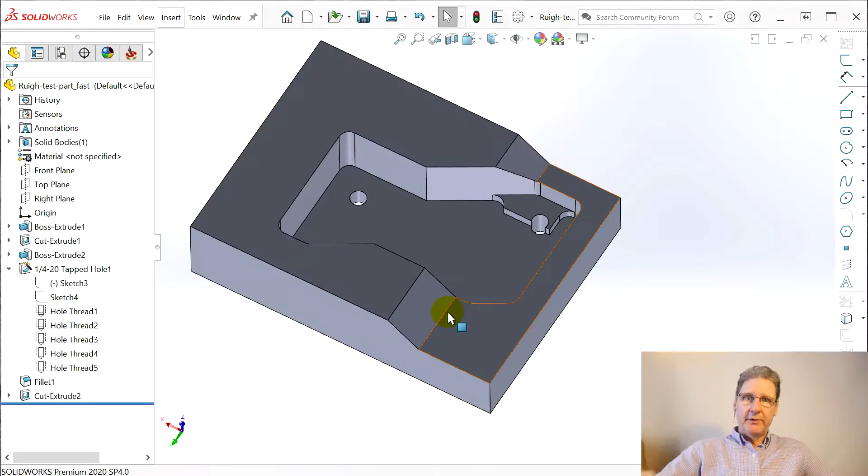So here's the SolidCAM tab, new part, milling part. And I'm learning.

Make this short so maybe that tree doesn't keep pushing over. Internal, we want it internal. Nice short name. We want to do a coordinate system now. I want it in a vise, like this. So select a face, pick an origin, flip it around, Z. That's the way it sits in my machine.

Accept all this, even though it causes problems later and there's no way to fix it that I found. Give it top setup. Say OK.

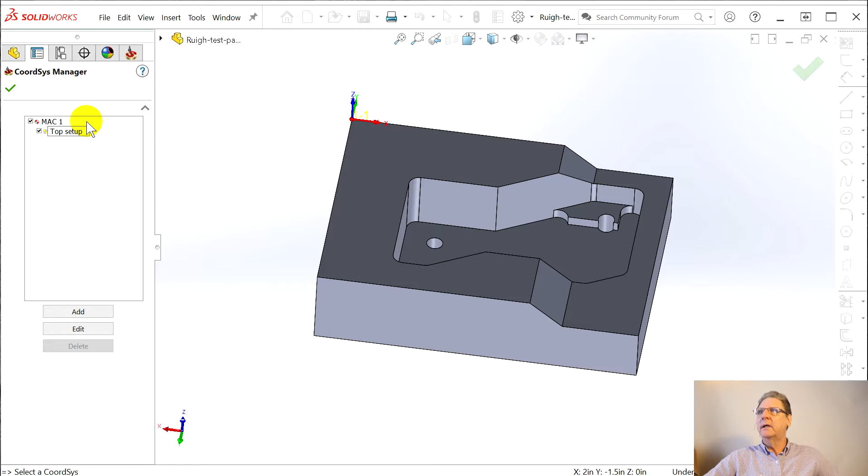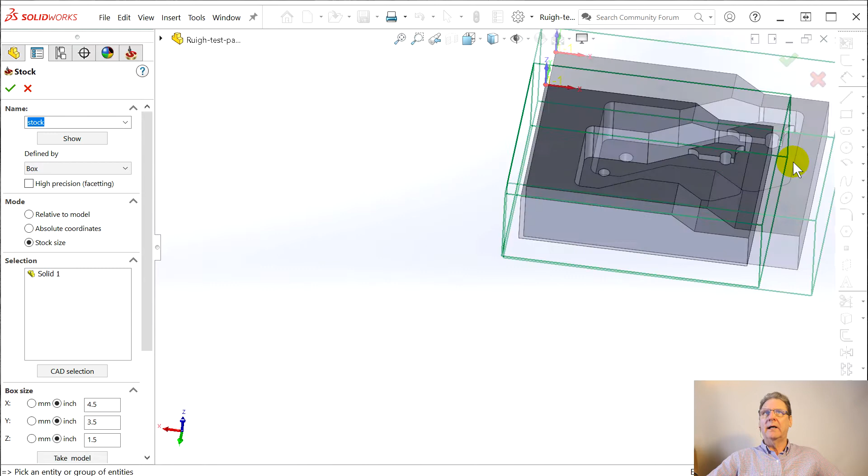Stock. I want to do it by stock size, the only rational way to do it. 4.5, 3.5 - you can't even do this in CAMWorks. 1.5, I happen to know. Oh gosh, see I'm rushing. I got to get what my mentor used to call a professional's tempo, because rushing isn't going to get it done. 0.4. So that's where we want the stock.

Then add box to model. We're going to need that to change the origin because we got to move part 0 here. It's clumsy. All this front end stuff is clumsy, but not the end of the world.

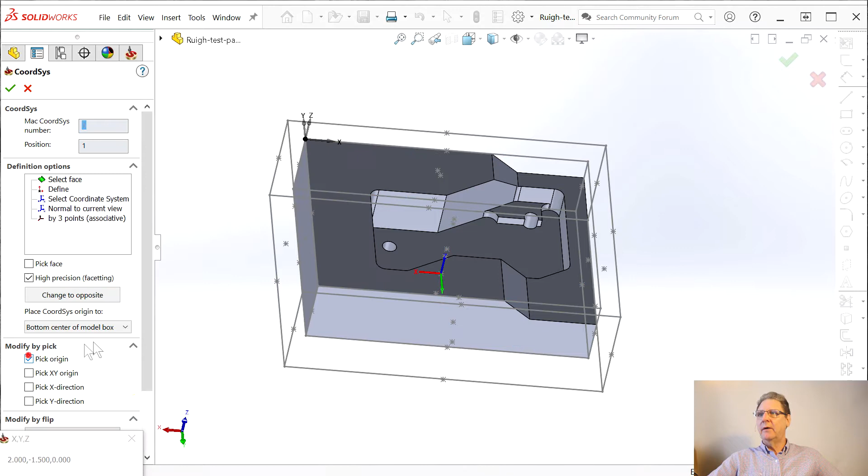Go back to coordinate system. Remember to go edit. Remember to go edit again. Remember to select the same face, but now pick the origin here. Once again, you've got to flip it around twice. Okay. Then say accept.

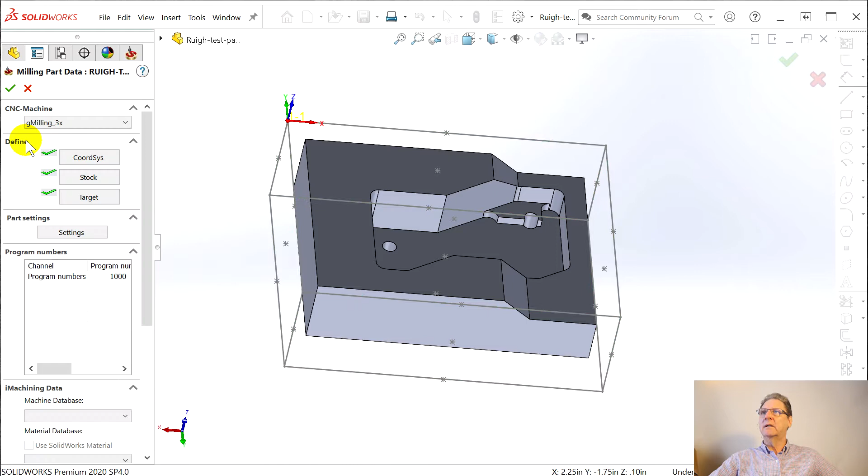Same name, but now the stock won't be right. So all you have to do is go into stock and go out of stock. And then you can accept this, and I think everything should be where it is. Okay, there's the stock, everything's right.

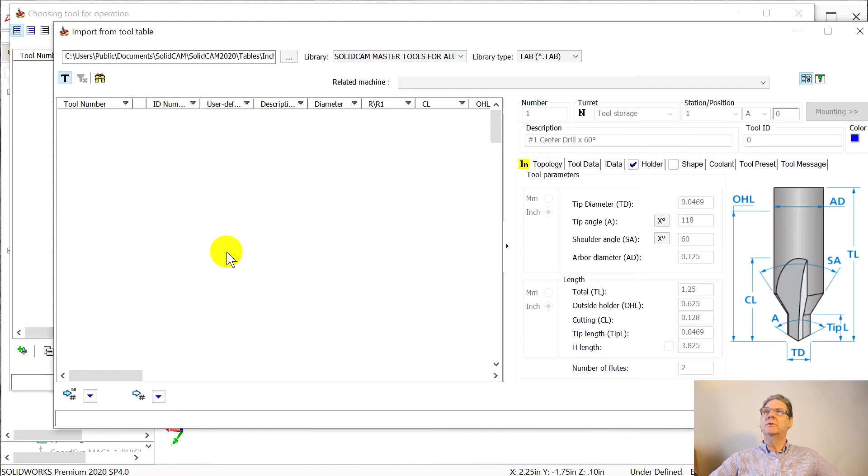So first thing here, add milling operation, face. You don't select anything. This is the way MasterCAM, a lot of them, work. Select a tool - you have to know to go to this mystery unlabeled button. You have to know to say SolidCAM Master Tools for aluminum. You have to know tool number 25. I've got it memorized - 1/4 inch carbide end mill, long enough to do the perimeter.

You got to remember to do this, next free tool number. Then you can go over here and close it. Then you can accept it up here. I hope you can just see that.

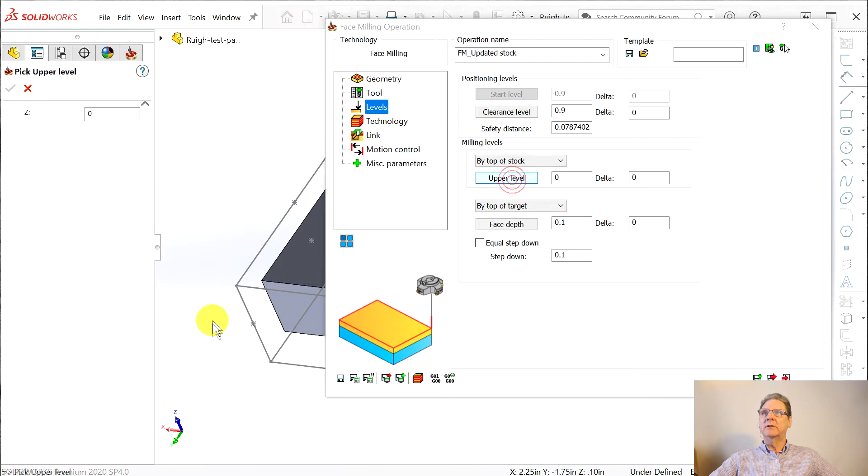Levels, upper level 0, I think that's right. Let's double check. There. 0, right. Face depth, this is right, but it's so nice - Visual Mill does this too. Technology, I don't like hatch. Let's do contour, I'm going to change this from the practice run I did.

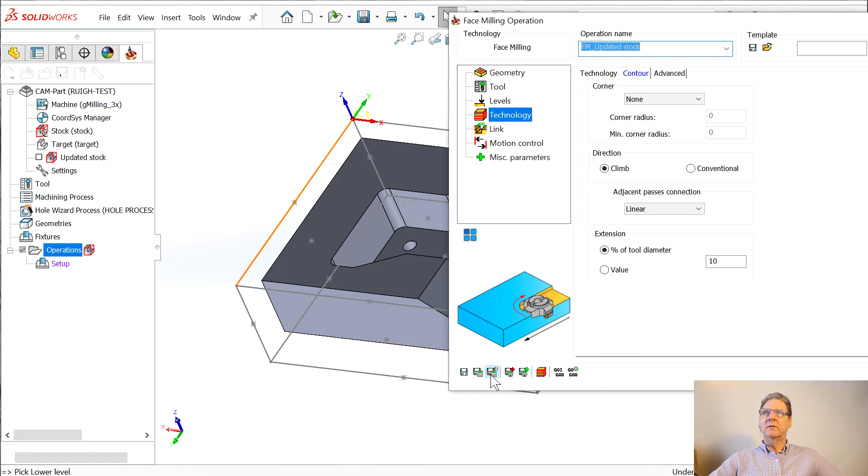I think we might even be ready to go. Let's take a look. See, this is where it complains because of all that gibberish in the coordinate system. And it goes around - it should be climb milling. I think it's smart enough to know that. The name, face, top.

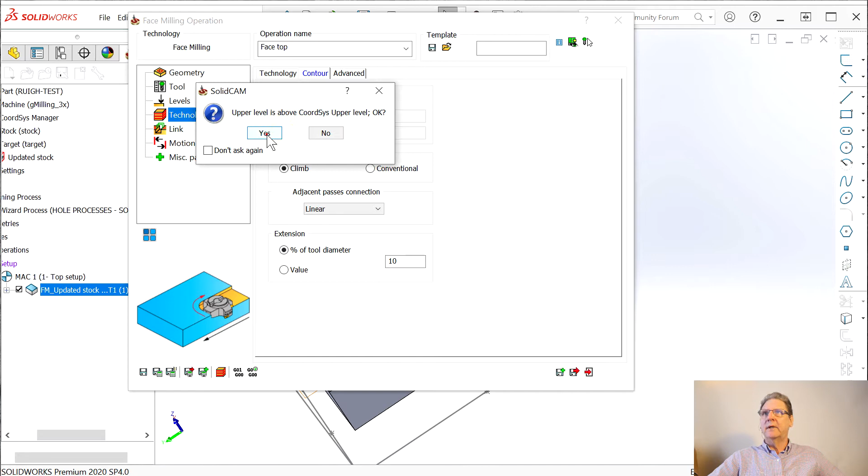And we can get out of this. Upper level, yes, face, top. See, this box keeps pushing over and keeps pushing over. Let's give it a little more room. Give it here. And, oh, this might be a trick.

I double clicked on this once. It gives you this box. And I just said exit. No, I didn't double click on it. I said delete. Then it gives this box and say exit. Say delete, exit. Well, it used to get shorter - nothing's ever the same with software. Twice, I think it would be deterministic.

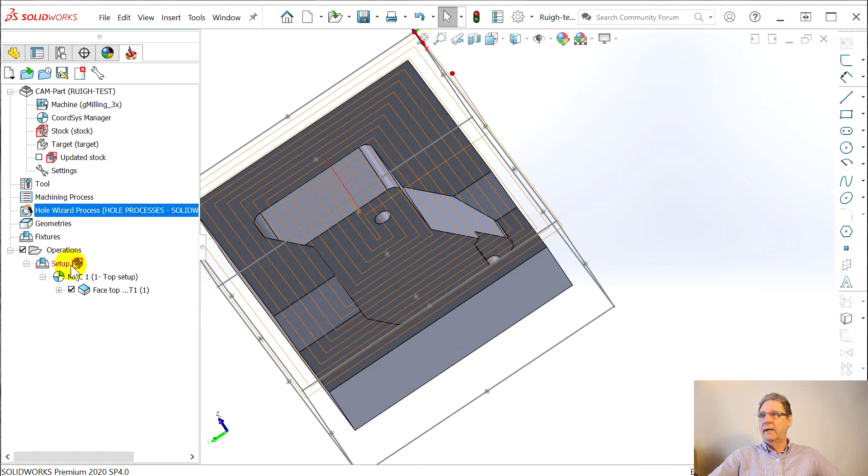Okay, we got a face. And you can unclick here. Oh, and we can also get rid of - we're done, I think - hide this, suppress the stock box. So this is our part. Go back to the SolidWorks thing, or SolidCAM tree.

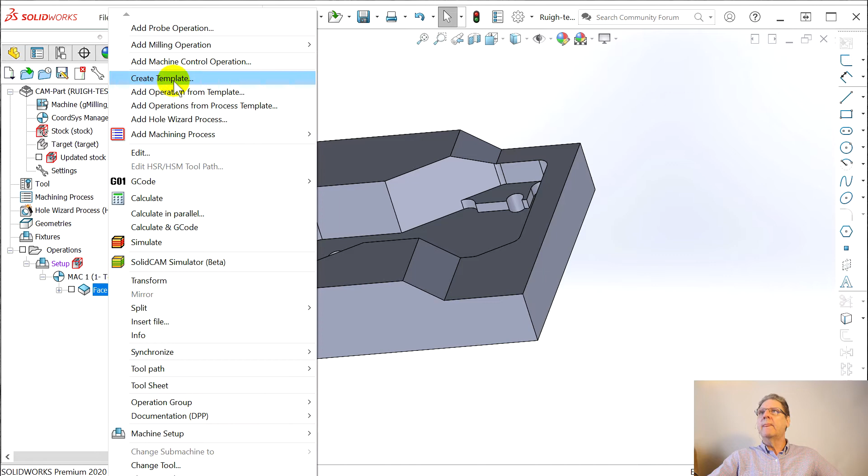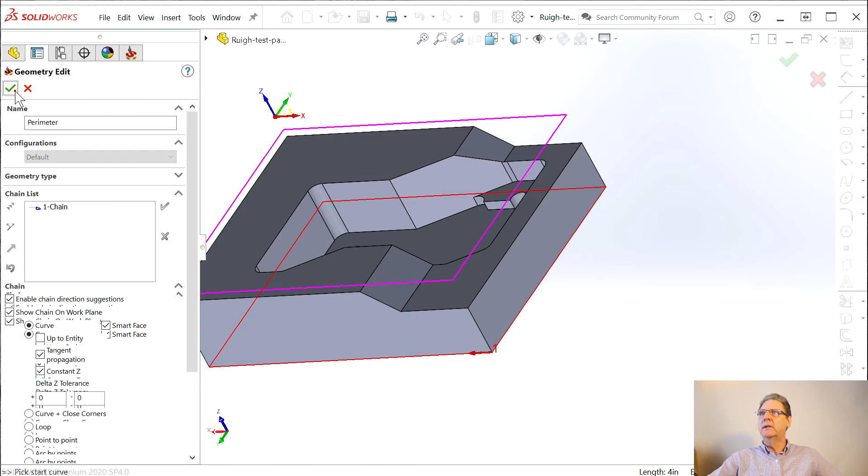Now we can go here, add milling operation, profile. The geometry, we're going to call this a perimeter. And we've learned from MasterCAM that you go here, so the arrow, and when you're on the left, it's climb milling. Say accept. Say accept.

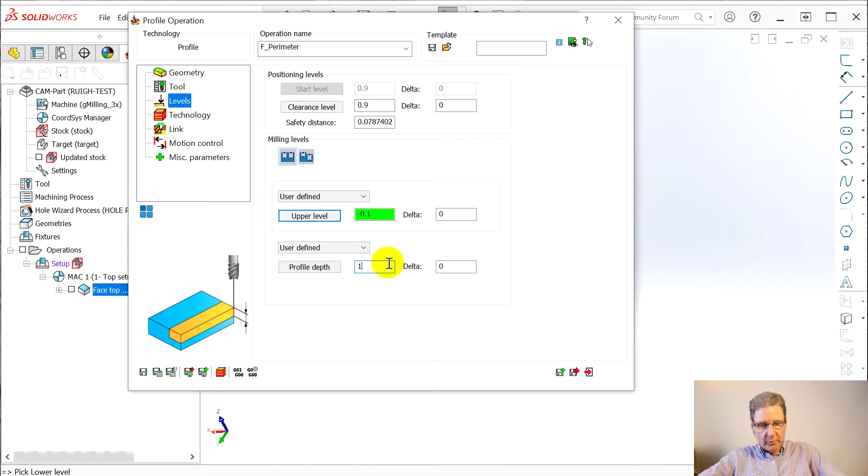Upper level, I think it's got this right. It is pretty intelligent, I have to admit. So we don't want to just go down 1 inch, which is the bottom of the part. We want to go 1.02, so we undercut it a little, so when we face the bottom, there's not a sharp edge.

Technology, left, that's good. I think all this is hunky-dory. Okay, clear offset, we want to clear 0.125. And we want the step over. This is to get the tiny corners of the stock, 0.125. And then equal step down, rough, 0.125.

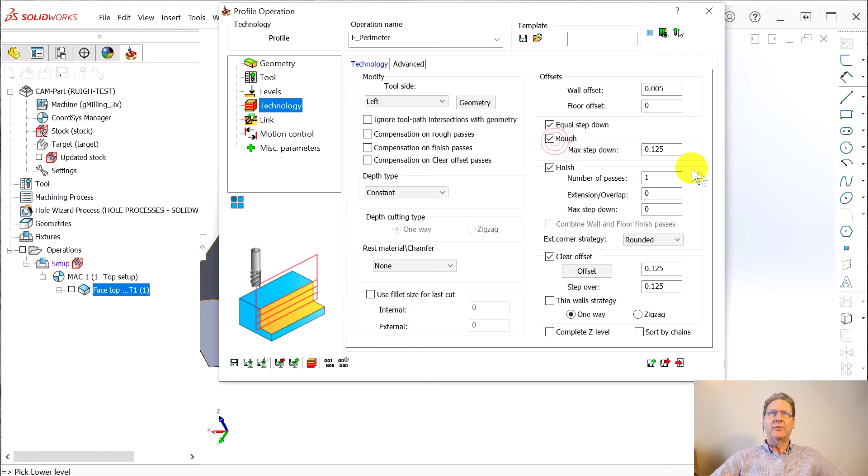I'm going to say no wall offset. I'm not sure I'm doing stuff right. Let's calculate a tool path. There they are, and see there's 2 of them. And that gets right here in the corners.

And you can extend the entry exit here if you're worried about the tool coming down on the stock. That's here in the link. Lead in, lead out, you can move it a little.

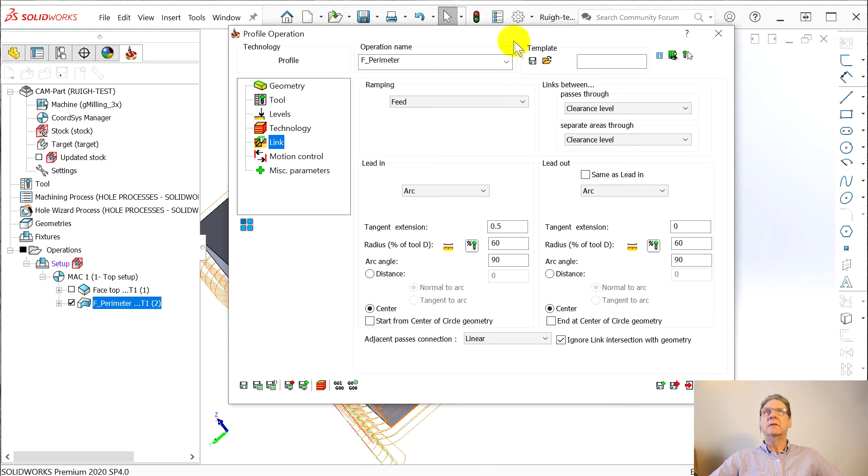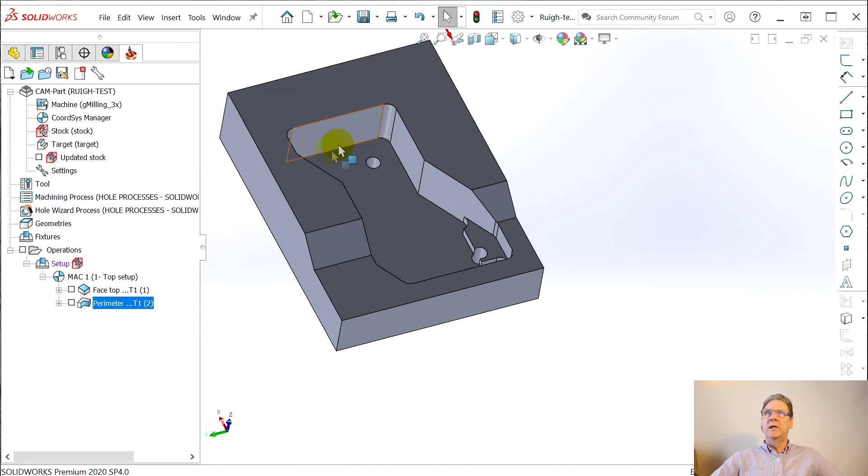Let's do the pocket too. Once down to this level, then the shallow pocket here. Add milling operation, pocket. Geometry, add the geometry, we're going to call this deep pocket.

And then the chain list, you got to remember to take off tangent propagation, and constant Z both. And then same thing, you can pick here, and then you can just go accept, accept, accept, accept, all the way around. Gets 2 little ones right there. That's wonderful, worth its weight in gold.

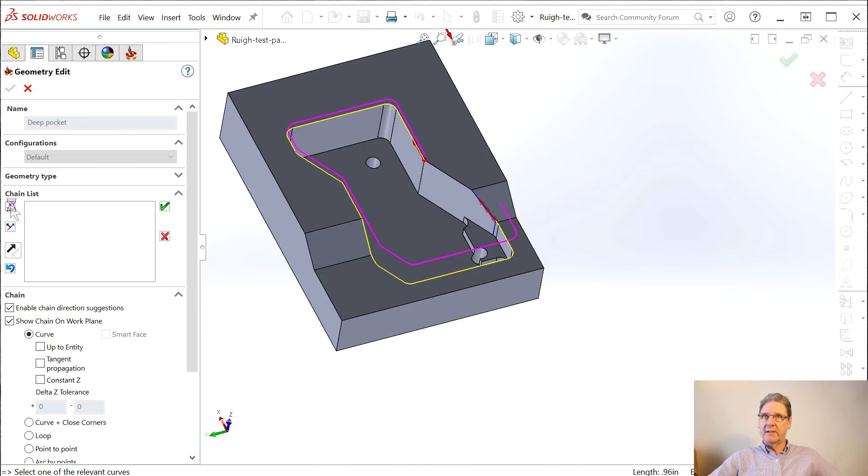It knows it's got a chain, asks if it's okay. You're out of here. Tool, same tool, click, click, click. Levels, now we might have to teach it. The upper level, I think it was smart enough, it got that right. The pocket depth, though, it doesn't know what to do with that.

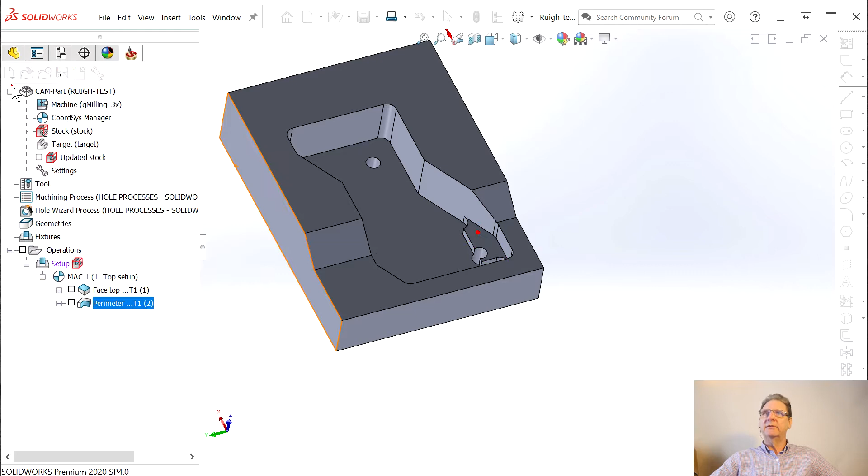So you give it a little help. It's got that. Technology, no offsets, contour, none of this. I think, wall finish floor, I think this is actually done.

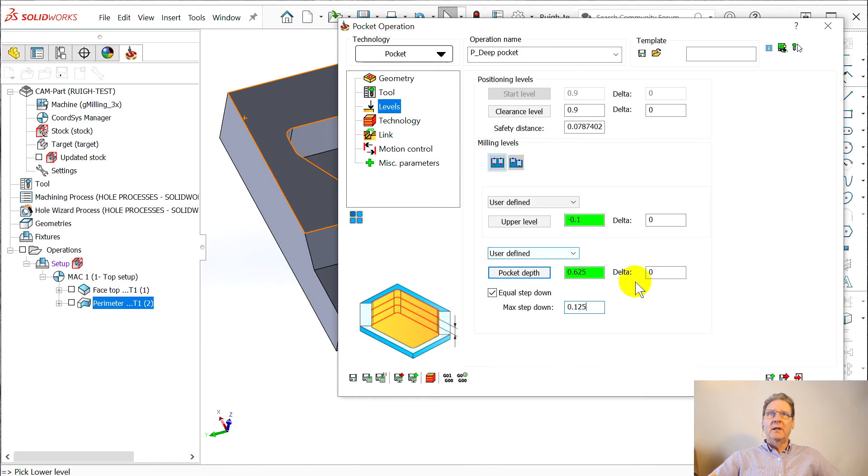Isn't a step down somewhere? Equal step down. See, everything's kind of in a different, it's in levels here. In contour, remember, it was somewhere else. And let's do a tool path and see.

There they are, real quick. Right? Just what I like to see. You can save, you can do, if this is save and copy this, which would inherit the tool. Let's just save and exit. Oh, it didn't. P for pocket, I guess.

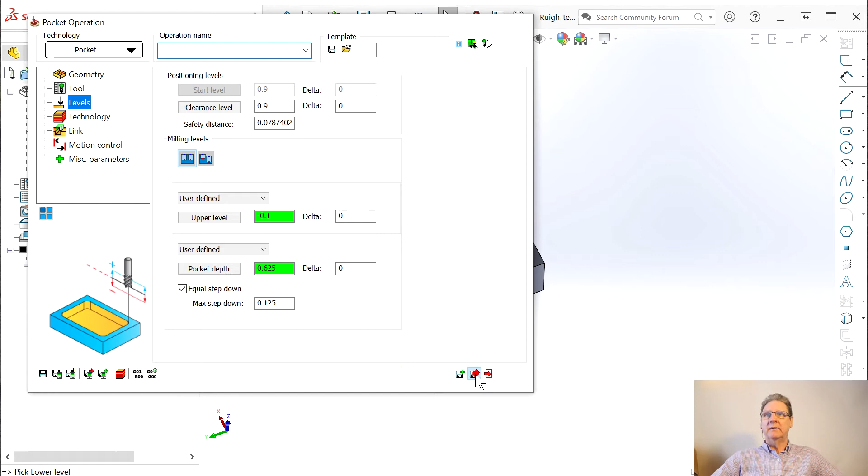Let's get rid of that. Delete, delete, and save it. Okay, hide the tool path. Add milling operation, pocket. Do the geometry, this one is shallow pocket.

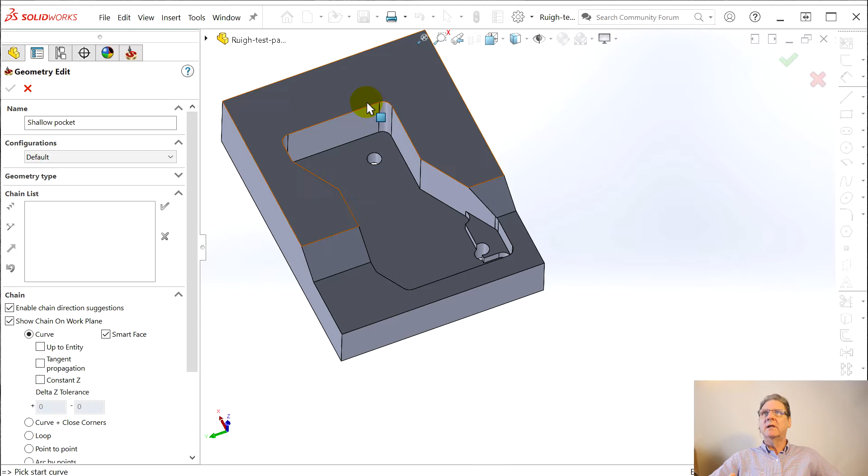This one's going to be clever. Same deal, take off tangent and here. Start at this part of the line. I assume it might do climb.

Now you can accept with this one here, accept all the way around till you get to, let me move this so you can see what we're going to do. This is fantastic, this is my buddy Dave taught me, the guy who designed this part.

Okay, now you do change direction. This one, go, change direction, go, change direction up. I know you got to do it once, otherwise it follows that line. So now it's back on the arc.

Change direction, go down. Change direction, go over. Change direction, go up. Change direction, go where we want it to go. Here, and now it should close.

Yes, we gave it a new name. Everything is good. Tool, select, just accept it. This quarter inch end mill's doing everything.

Levels, see, upper level, see, it would do the whole top. It's because the geometry was starting at the top, but we know we want to start there, already down there. And the bottom, we want to go here.

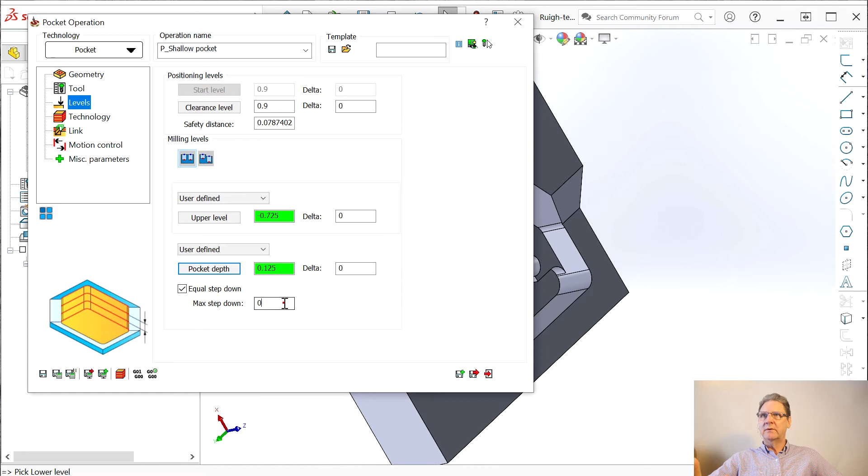This is so civilized. Technology, I think all this stuff is cool. Levels, we might want to do 2 levels, which means, 0.1 or whatever.

Let's see if we can do this. There they are. And the fact that it snuck in here and did that, when we did 3D iMachining, we had trouble getting that to work right. So do we got a name?

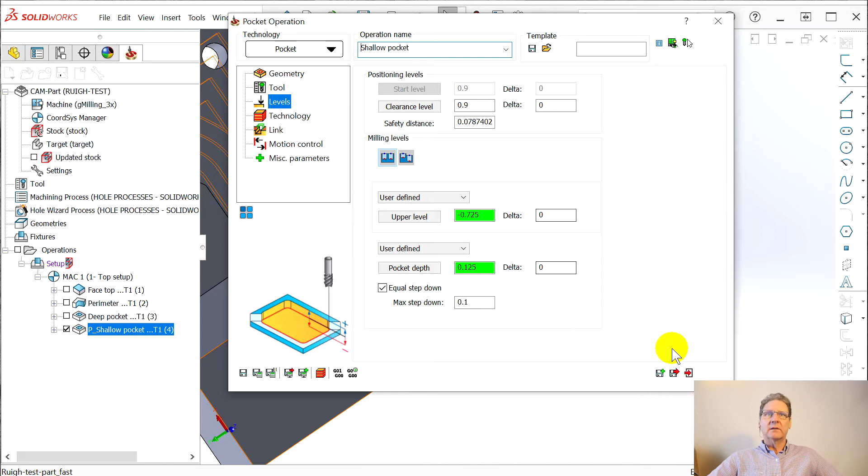Not, it always adds a little to the because you might have one geometry that you use 5 different operations. I think we're okay, shallow pocket. All right, oops, sorry, okay.

So now let's go, we want to do this flat here. Dave showed me how to do that, and this is even cleaner than MasterCAM. Watch this: add milling operation, profile.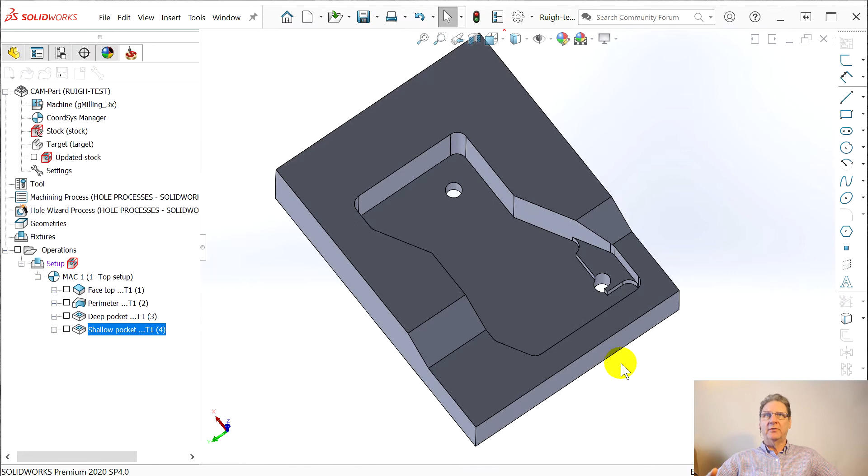Just a simple profile, it's thinking for a bit. Geometry, and only, I don't know, maybe MasterCAM lets you do this. You go down here and say point to point.

And the profile, let's see, we want to be on the left, so you go here and pick this point here. Draws that line, there's our arrow, so being on the left will make it climb milling. You got to accept it here.

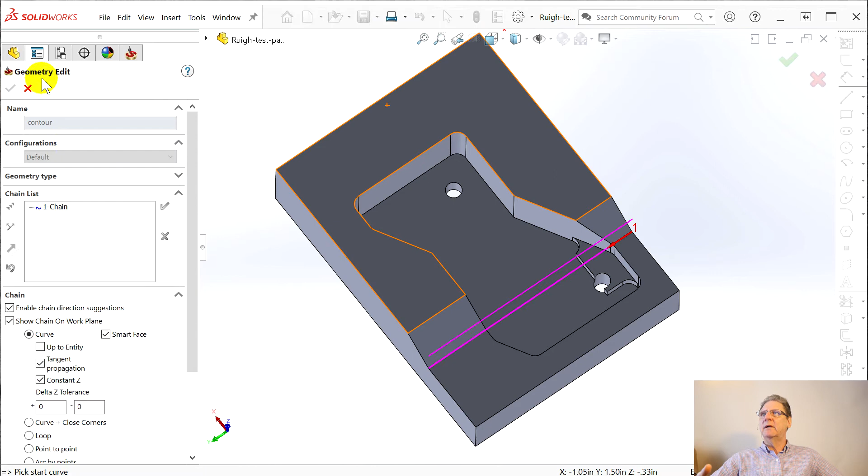Everything's a little confusing, go here. Oh, I didn't name it. All right, well, that's life. Could we see? And if you go to edit it, it won't let you rename it, it's already in their data structure, so tough luck.

And here, let's see, just accept the tool. Levels, top of target. Profile depth, I happen to know that's right. See, this is where you got to remember step downs. Oh, and you got to do clear offset because you don't just want to do one pass.

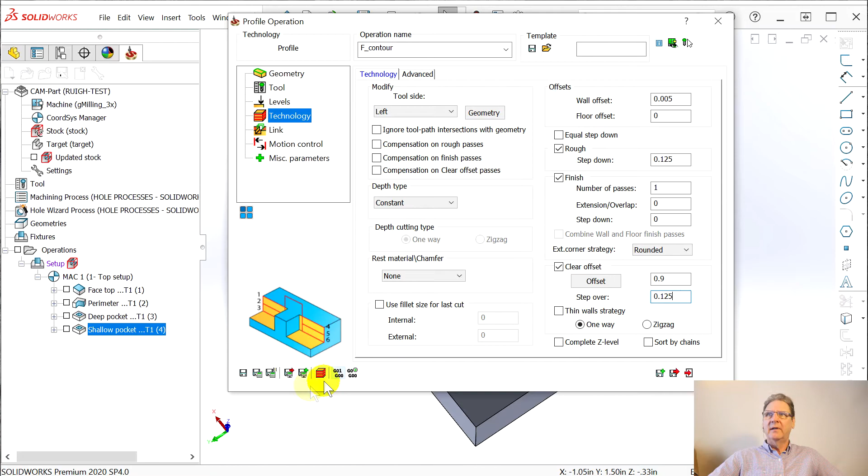And I happen to know 0.9 with 1/8 inch, 0.125. Go here. What are we, 12 minutes in? And that looks pretty good, right?

So now we know this is the flat. And get out of this. Okay, so we got our flat.

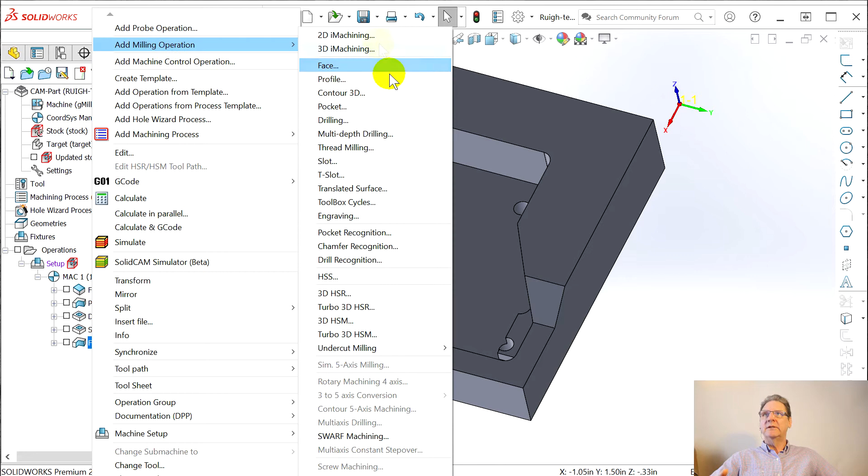So we're rocking now. Add milling operation. Now we're into, this is still in the base package. There are 2 high-speed surfacing options in the base package.

And of course their dialog boxes are different. I think linear and constant Z. So we're going to stay here in linear.

The geometry is pretty basic. You go here and here. Those 2 faces are what we want to do.

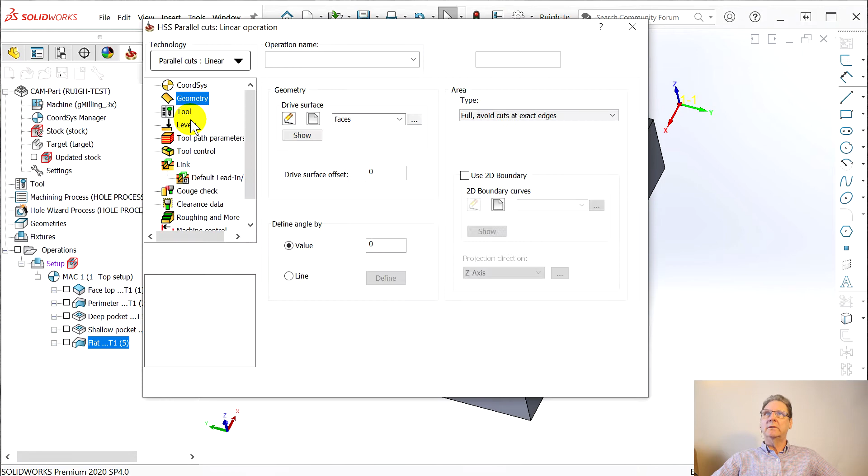The tool, and this was what was so clever. I was using a ball mill going across. Dave's like, no, you keep the square end mill, but you don't go across it, you come down on it. I think, or is it, this step over is what we're going to want to tighten up, but let's go look at it, make sure it's doing what we want.

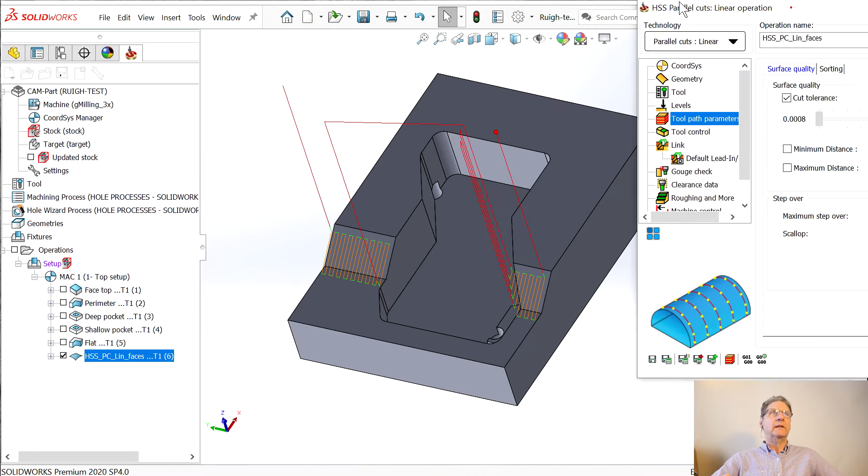Yep, see, happy days are here again. I did a trial run, I had this advanced. I'm not sure if that screwed it up or, be in simple mode seems to work.

Now we're going to make it really fine, 0.0001, 10,000th of an inch. I don't like these tall step overs.

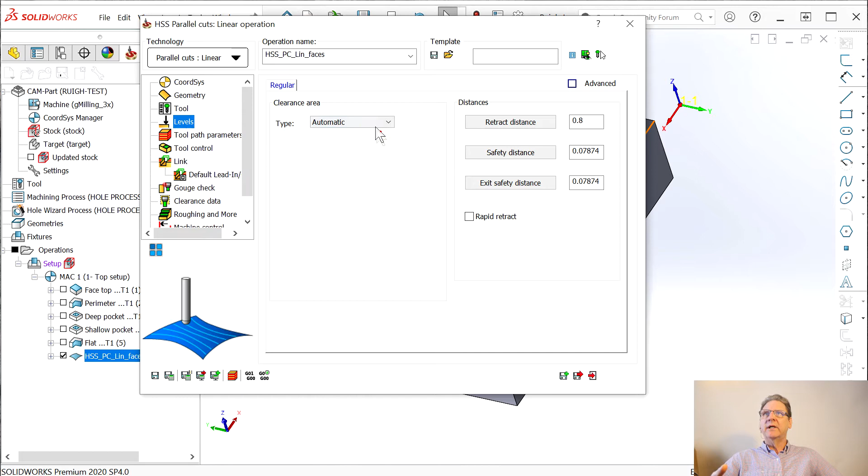That, or clearance, I think that is in levels. Clearance area, automatic, change it to a plane. 0.2, let's try that. It's kind of ridiculous, but okay.

So everything seems okay. I'm not sure it'll crash or not. We'll see.

And this is slopes. File, save all. SolidCAM, I crashed this once practicing because I did some goofy stuff.

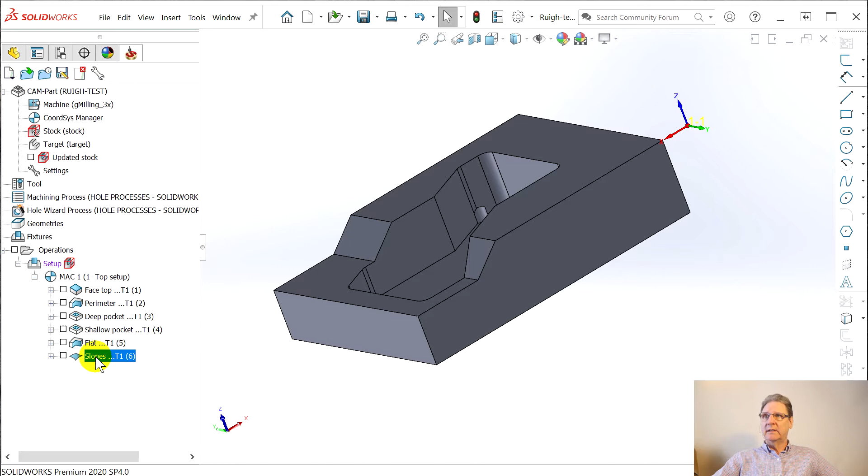Now here's the money, this fantastic simulator. See, now it's doing the slopes.

And when you do the compare function, everything on top is green. The side walls, that's within 1,000th, plus or minus 1,000th. And you can tighten these up and adjust it.

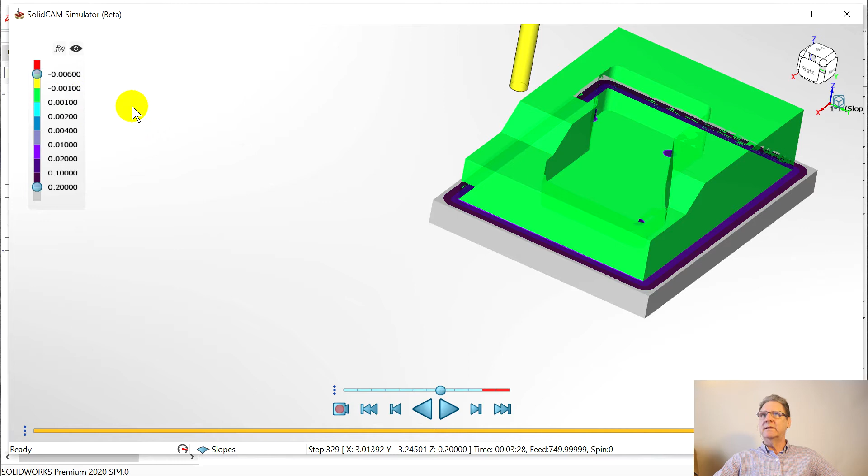I did have it crash once and all these colors went to purple. So then you got to go here and recreate the default colors that they used. But this simulator, worth its weight in gold if you're going to do any 3D, any surfaces.

All right, what's next? Operations. You can barely see it. Machine setup, not at the start, at the end of the, it's just off your screen, at end of operation tree.

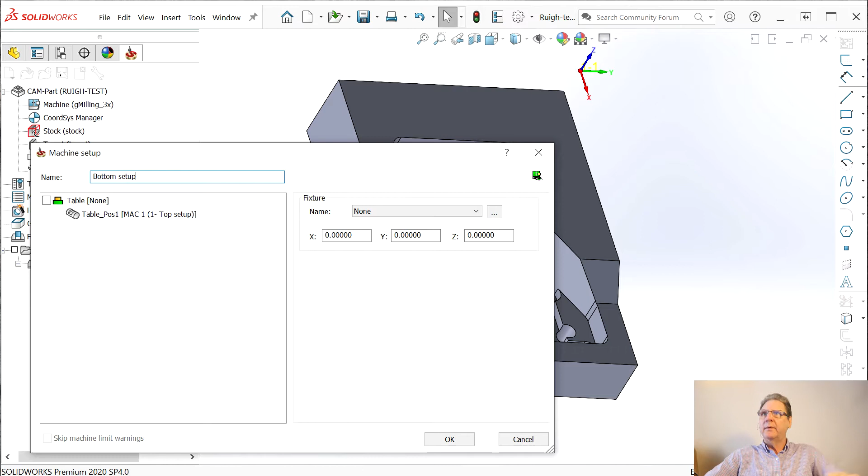This is going to be bottom setup. And you go here, and we need a new coordinate system. And now you go add, and you select a face. We're going to have it in a vise like this, so this face.

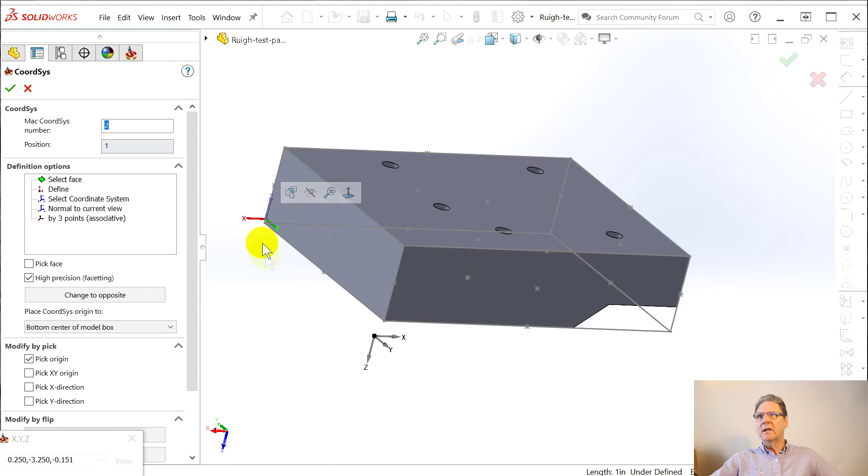Pick the origin. Oops, that's a mistake. Pick the origin again. There, get that little point. There we go. And Z is correct, so we flip around Z once, twice.

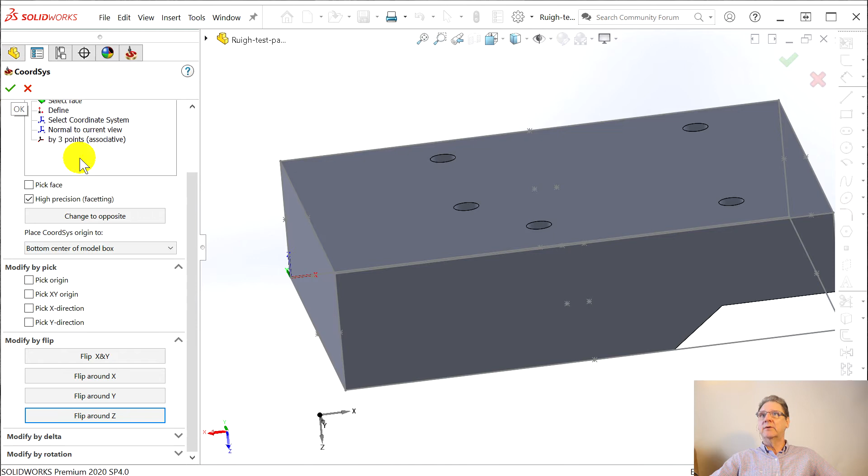Now it's in the vise, fixed jaws in the back, the way you're supposed to. You have to make part 0 part of the part, or it won't be precisely the right height, right? So I figure you find the parallel. We went through this in the slow shows. You got to accept all this.

It's goofy. Now is our chance to rename when it comes up. Here we can say bottom setup. And don't say add, that's how we got here. Bottom setup, bottom setup. I think we're okay.

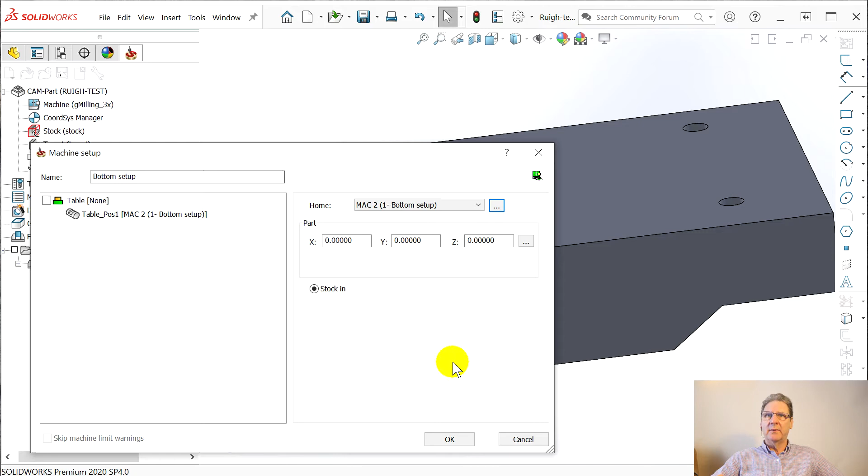By the way, up here is where you add fixtures for any given setup. I made that mistake, see, and you can't click there. You got to go way up here and click add milling operation, face. Don't select any geometry, but do select our tool.

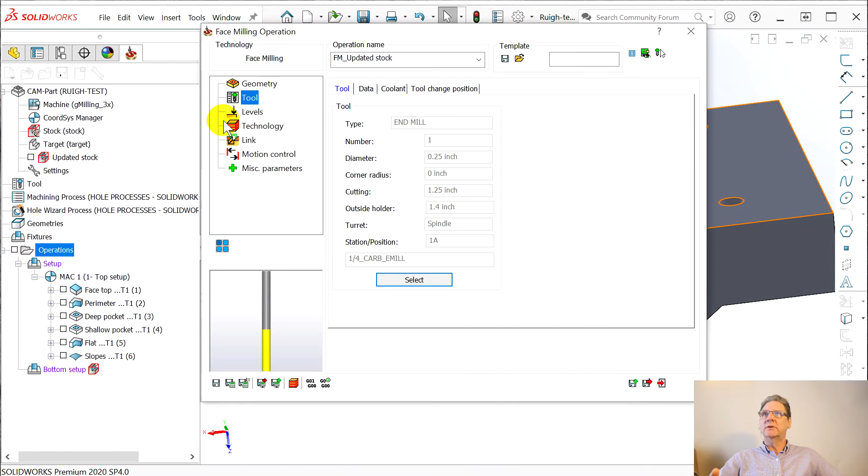See how cool this part has been thought out, even though it tortures CAM systems. Levels, face depth, it's got that right, equal step down. Let's make it even number of step downs.

Technology, I don't like hatch, I like contour. I'm a contour oriented guy. Let's go over here so you can watch it. Tool paths, always gives you that thing. Okay, there's our levels. It's going around. Life is good.

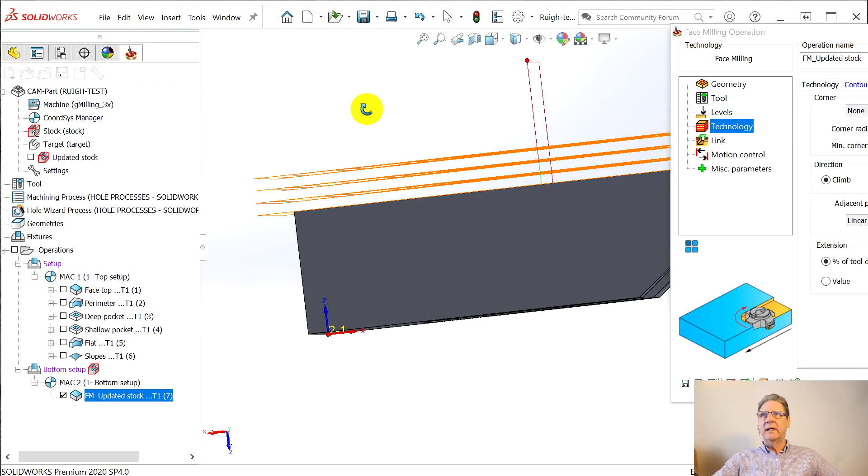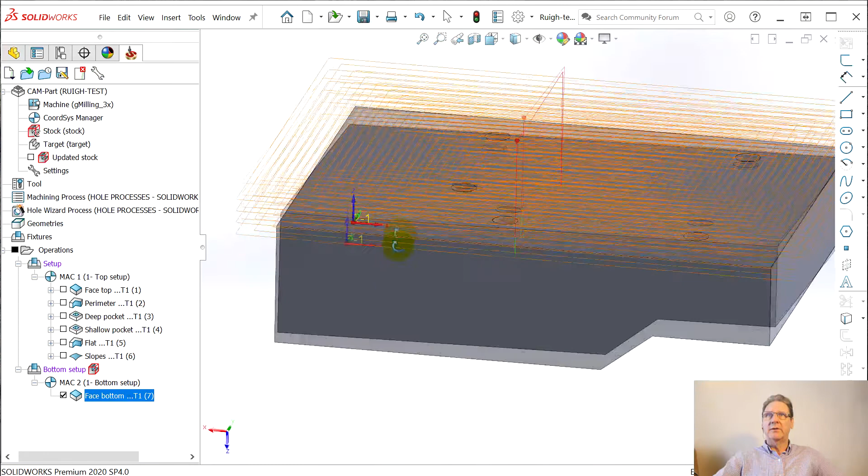Now we're ready to center drill. So we can click here, add milling operation, drilling. Geometry - in my testing, unlike MasterCAM, it actually pays attention to the order. So I figure let's do the closest ones first as it sits in the vise. Don't pick the side, because then it has depth information.

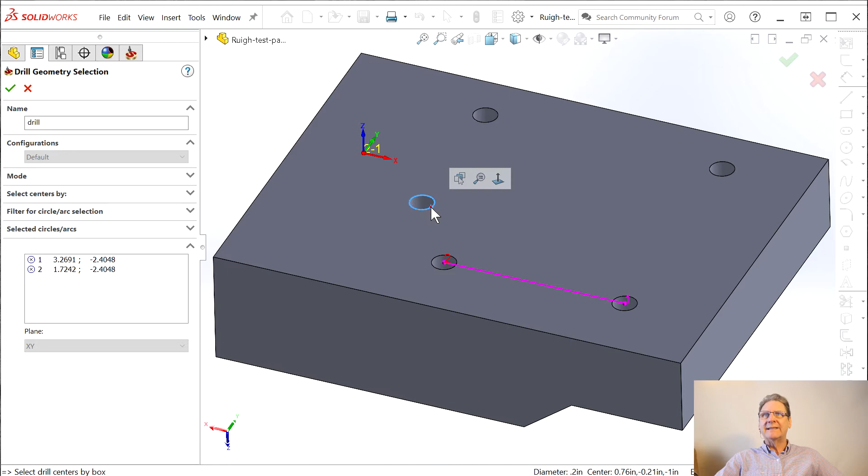Oh, that didn't work out too good. I'm hitting the delete key. Okay. And see, it's going to do them in this order, which is just delightful.

This is, let's not say drill, let's say holes. These are, the geometry is for the holes. We're going to keep reusing this. And I think it's happy.

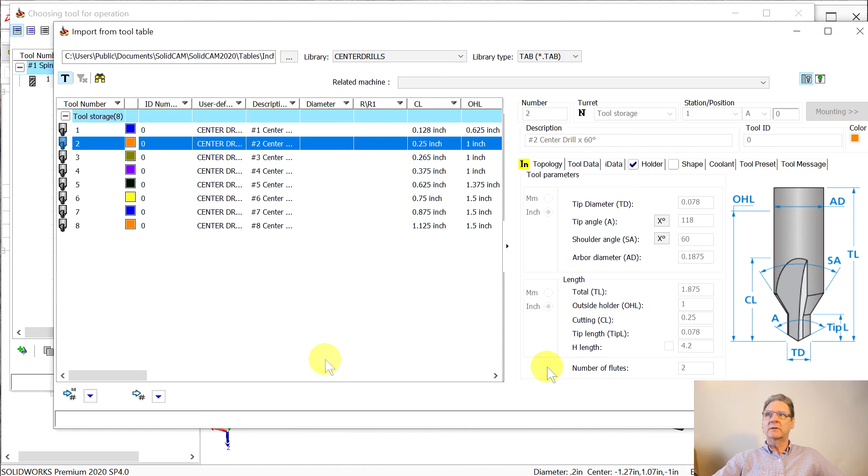Tool select, now we're going to add our first tool. Where do you do that? I wish they'd label buttons. Good gosh, I don't know why it's easier for me to remember that kind of stuff. Center drills, 1/4 inch center drill, there it is. Remember to go here, next free tool number, and then just dismiss it. Then you got to go here and accept it.

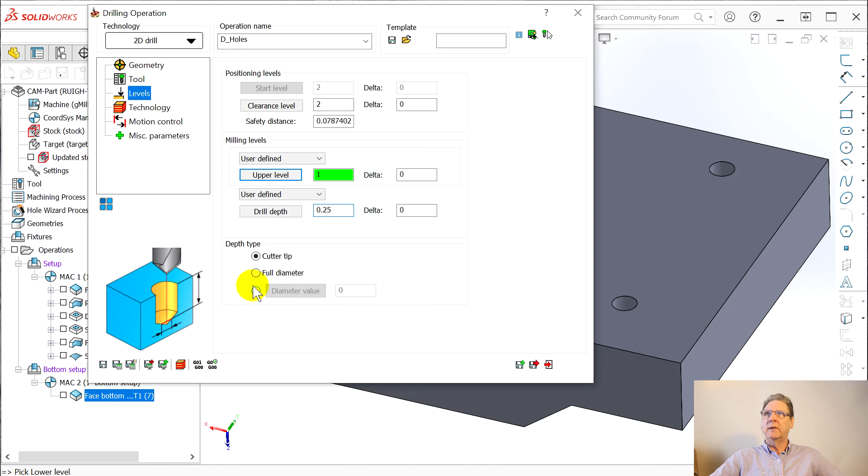Levels, the upper level, I think it's got that right, 1 inch. Yes, the drill depth, we don't want to go down there. I happen to know from practicing and practicing, 0.25 is as deep as we want to go. I don't think there's that much else to worry about.

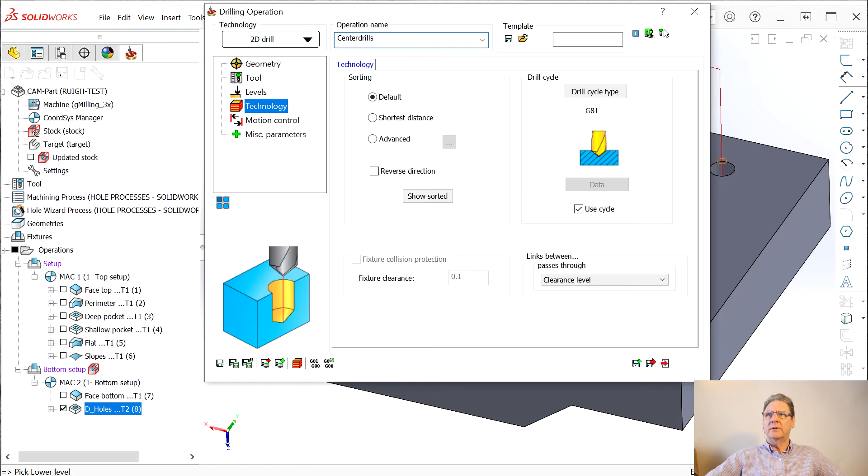Let's make the tool paths. There they are. Let's exit. We should exit and copy, but I'm going to re-click on this. And this is center drill. Center drills. And now we get out of it.

Hide the tool path. Oh, let's do this so you can see a little better. Go up here. Okay, and drilling. Now this is the actual drill. I'm not going to chamfer.

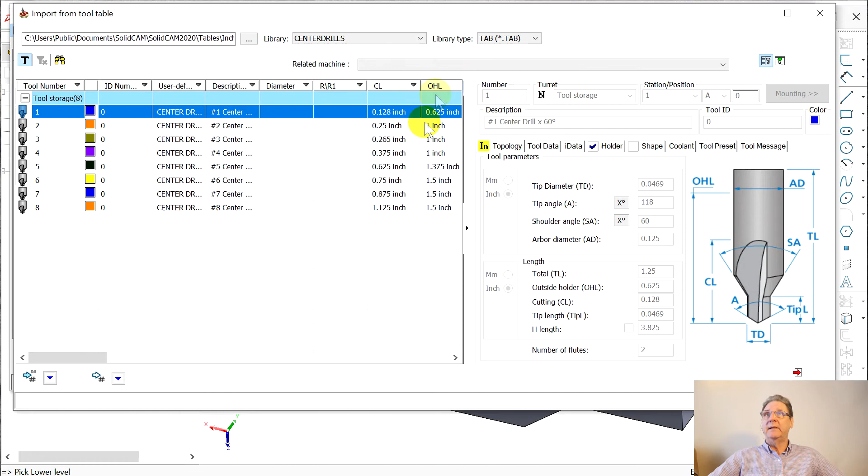This is so goofy the way they - I don't know, maybe it's probably the way it has to be done. I'll be going back to Visual Mill after this practice and try how that works.

What are we trying to do? Drills, happen to know it's number 7. We got to go this direction. Number 7 carbide drill, 201.

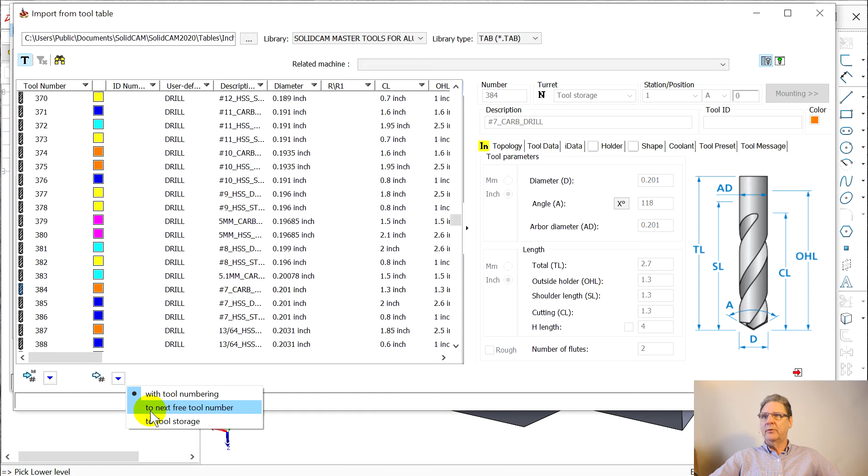That's for cutting tap. For a rolling tap, it's a number 1. But next free tool number, we can close. Now we got our drill. Now we can accept that over here.

Levels, upper level was 1. The drill depth, I happen to know, is - I like leading zeros, that's how I was taught - 0.44. Even though SolidWorks defines it as 0.38, that's to the shank, or the flank of the drill. This does to the tip of the drill, and you gotta deal with all that. We'll show you why that's actually the right thing.

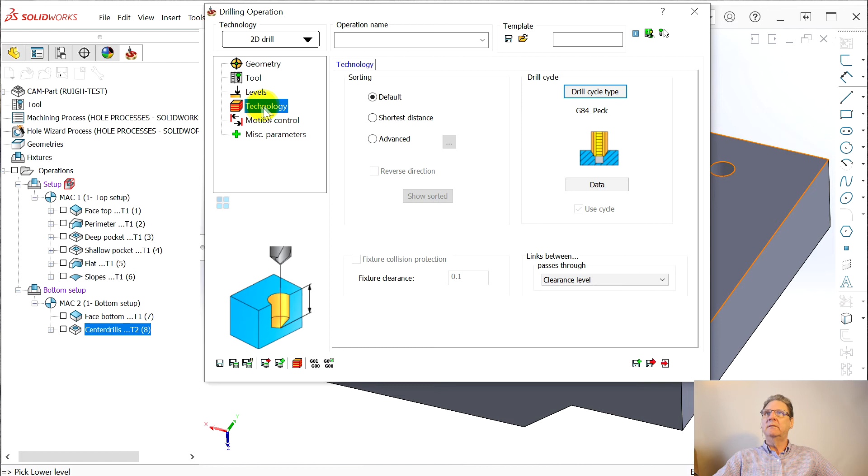I think peck, I wish they'd... why am I calling out G-codes? I bought this program so I don't have to worry about G-codes. Once again, let's do our thing.

No geometry selected, how about that? Geometry, and now you can just go holes. Now we're gonna do it. Notice it does them in the same order. With MasterCam there was some goofy thing.

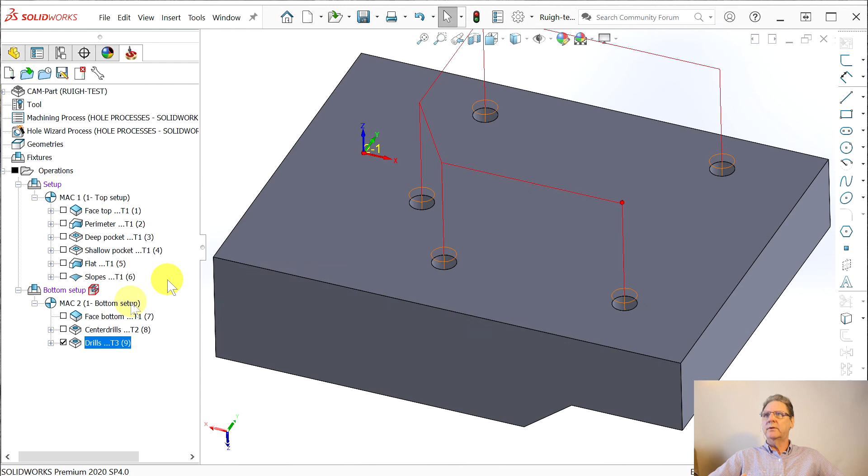Drills, and save out of it. So there's our drills, hide that. Add milling operation, 21 minutes. We're doing pretty good, drilling. Geometry, that same geometry, holes. This all seemed complicated and clumsy to me until I used it for a while.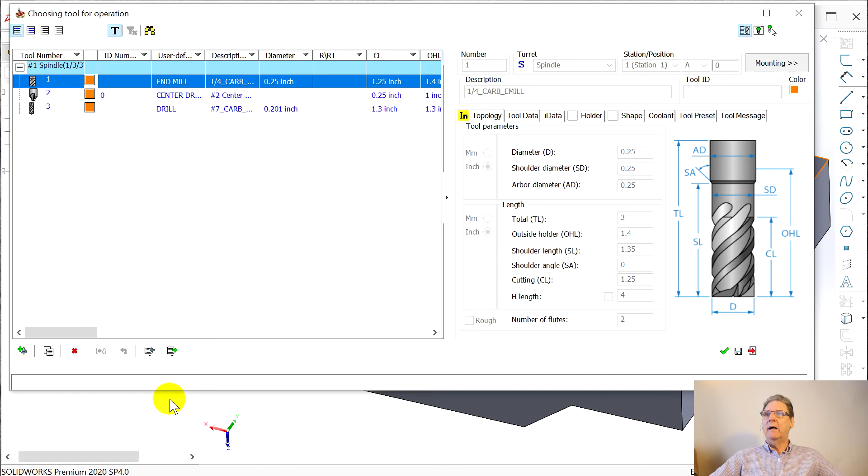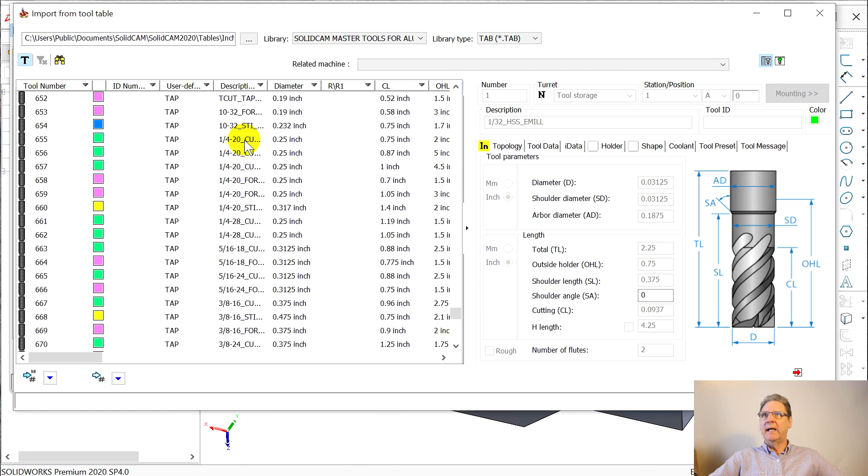Now we're going to have to make a new one. It's got master library up here, and we go down. Taps, here they are. Taps 5, quarter 20, where is it? Quarter 20, I don't know what this STI is. No, that's a form tap. That would be a busted tap. We can use the stubby one. Excuse me, we're not going down very far.

Pick it, okay so there's our tap, accept that. Levels, the upper level's right. The drill depth, I happen to know to work out the best, to make a good point for you folks. 0.4, let's go 0.40.

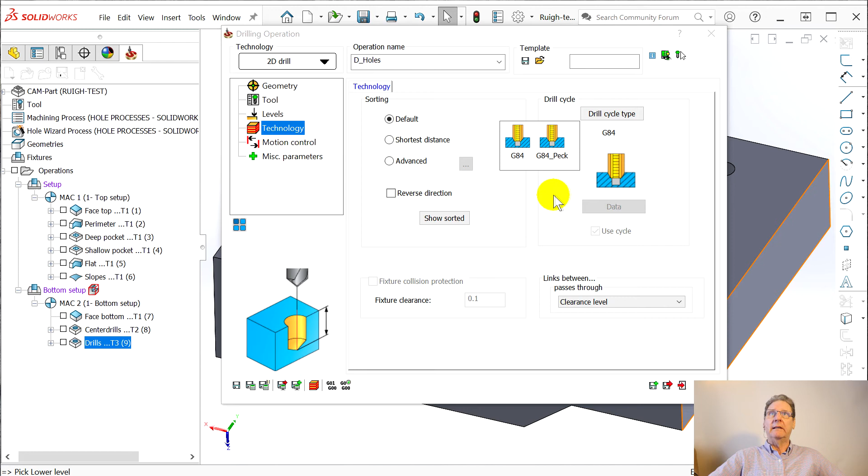Technology, drill, cycle type, G84, is that - can you peck a tap? I don't know, let's leave it where it was. And hopefully, there they are. So nominally done in 23 minutes.

Excuse me, here. Now let's do file, save all. I crashed it once.

Let's do - this simulator is just so good.

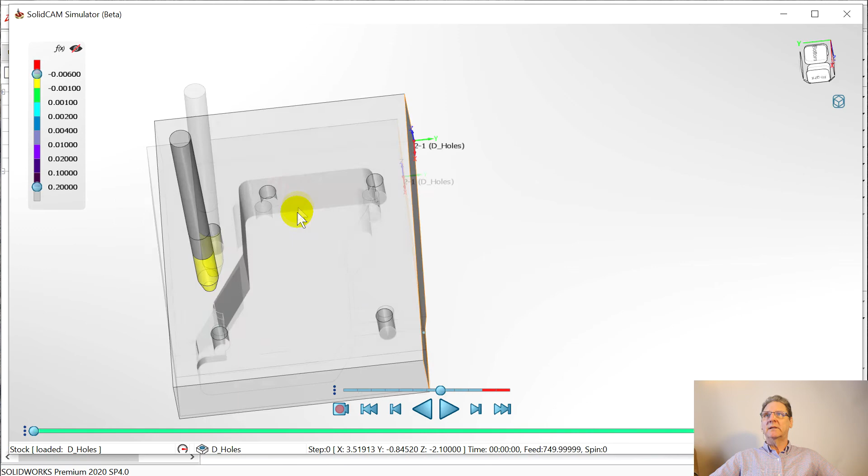This program is priced like MasterCam with modules, right? The basic program is less, about $5,000. You get a deal. What's going on?

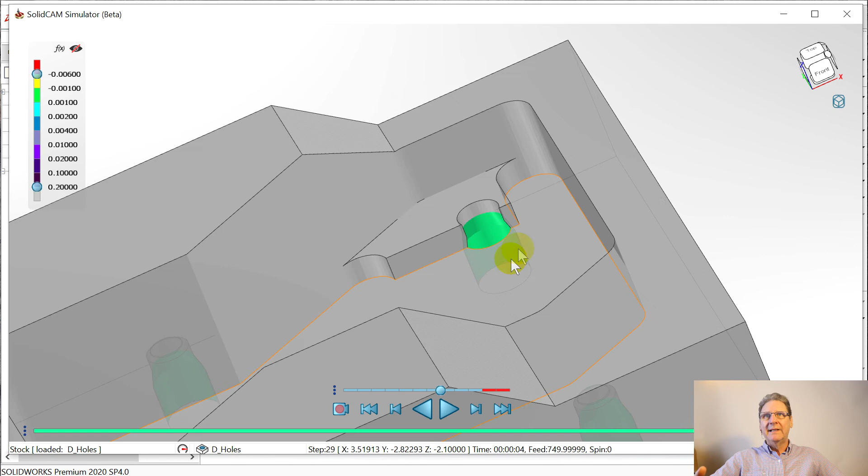Okay, so this is the tap. Notice they modeled the taper of the tap, and you can play with that. If you adjust that tool and go here - and then what convinced me that this program is worth its weight in gold - you can see with that 0.40, the tap doesn't quite go deep enough here. I mean it's tapping but it's not all the way through. And here, though, here's where it seems correct, right? Because it's not bottoming. This corner is where the drill is, the 0.201 drill. So now do compare. A tap looks like a gouge, right?

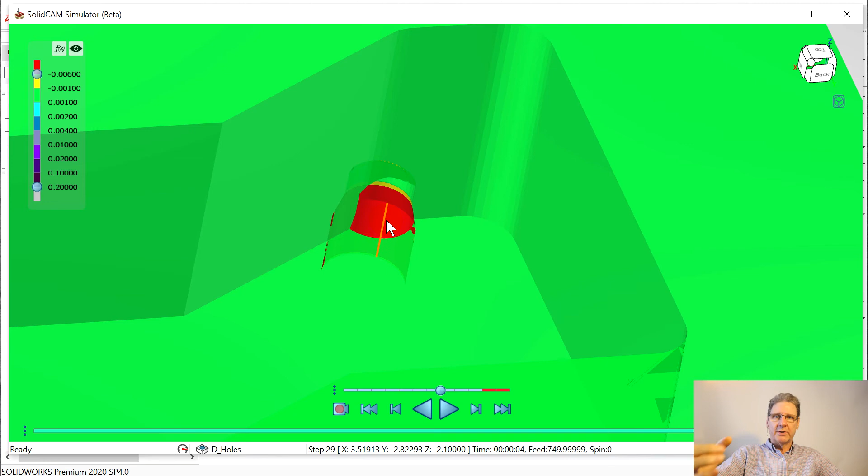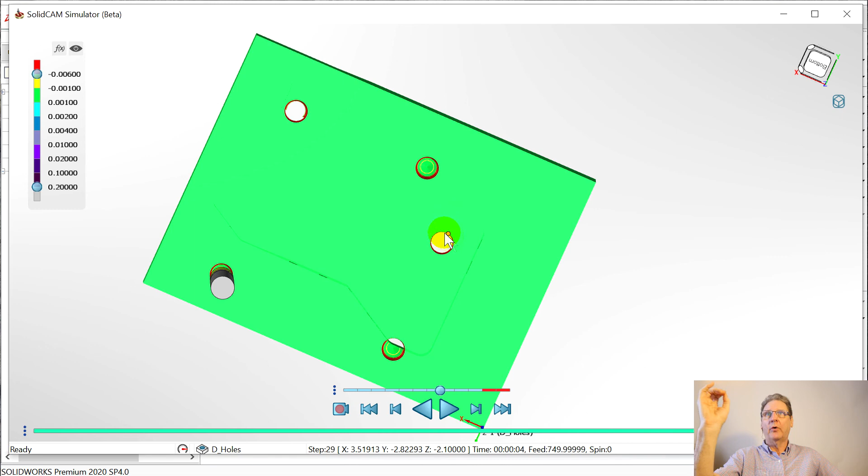It's red because SolidWorks models the tapped hole as a 0.201, but the tap is actually the outside edge of the threads. So all these programs show it as a gouge. But notice when we look at the holes, control setting - even though they're 0.38 in SolidWorks, by setting them to 0.44, the tap drill went, so it's green, the blind hole is green. You can't quite see this one, it's green. So that's the exact right length.

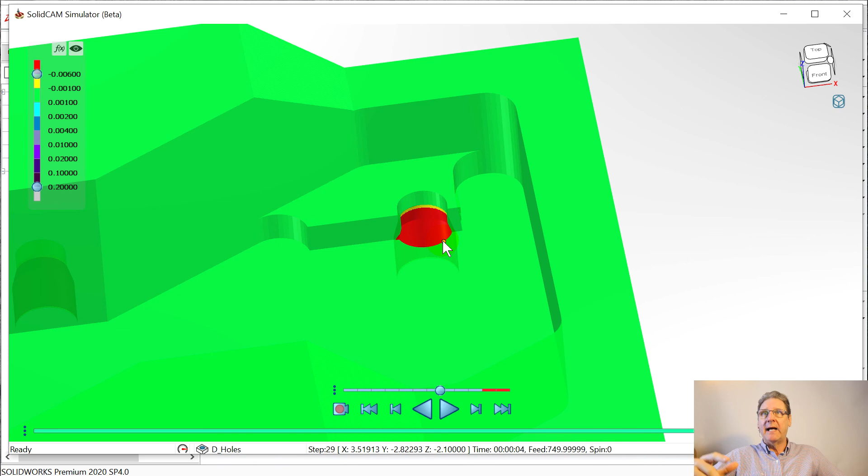It broke out here, but see, why this is worth its weight in gold - the simulator and the way they model the tap with the taper. And of course you've got to model the tap to match a real physical tap: bottoming, plug, normal. But you can see exactly what's going on here, and you're not going to drive a tap into a bottom.

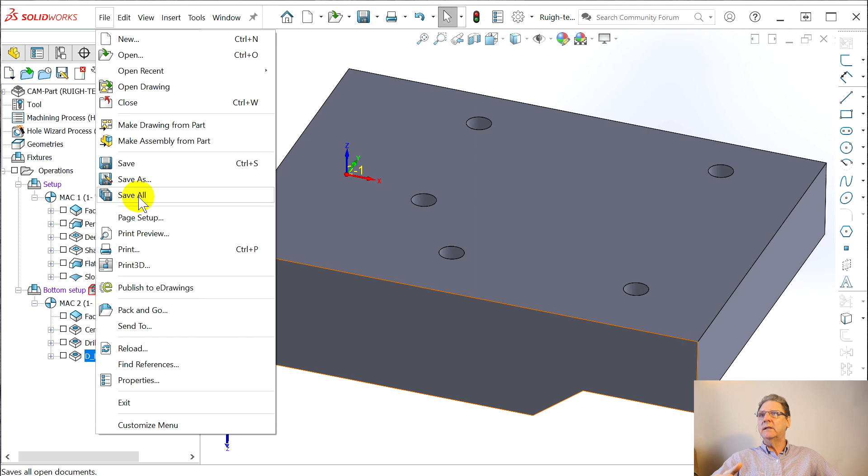About 22 minutes with a couple minutes of enjoyment here. Let's close that, do a file save all again, save all. Let's do operations, simulate - oh no, this is the conventional simulator.

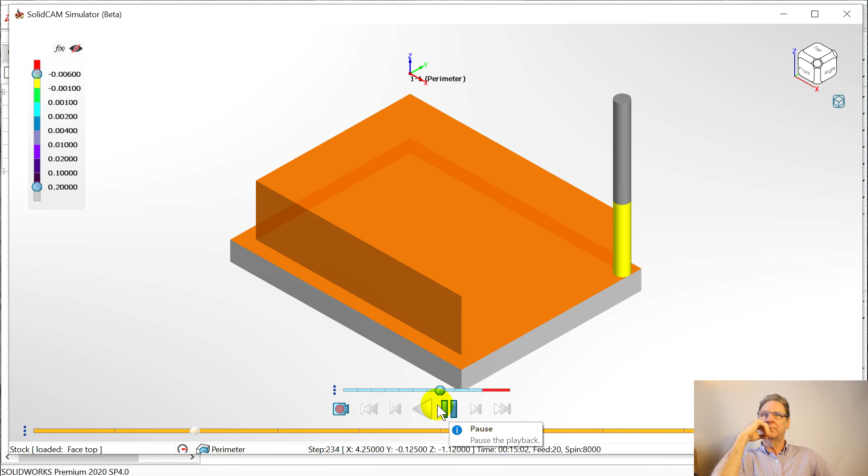Operations, beta simulator, this is the baby. And we're pretty fast. So there's our facing, there's our perimeter. Here's the deep pocket - oh no, it's steps on the deep pocket. Here's the shallow pocket. Here's the flat. Here's the slope. I think you can do this real time.

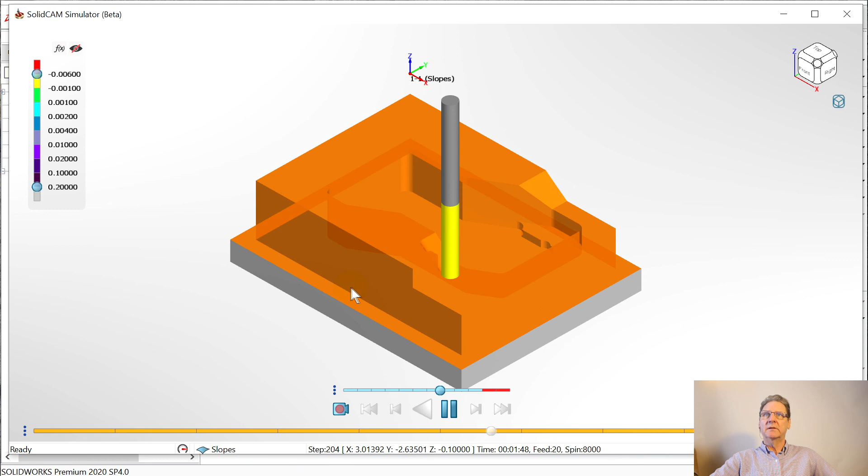Yeah, isn't that amazing? Compare function. Okay, flip it over, facing the bottom.

This is more money than I want to spend, you know, because if you start getting 3D modules, bam, bam, bam. Okay, that's it.

26 minutes, and we even simulated, and of course it took longer to learn all this, and I practiced once and screwed it up, but that's SolidCAM as fast as I can make Dave Ruigh's test part.